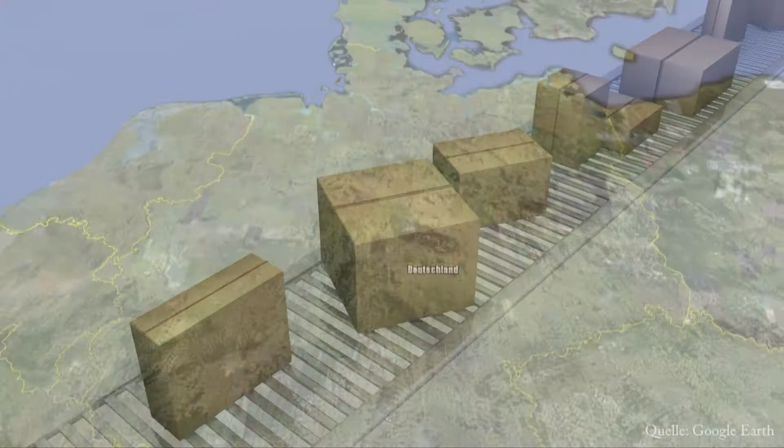Life is becoming faster and more flexible. Individuality is the buzzword. Over 100 million additional goods consignments in Germany alone. This logistical challenge calls for a new approach to a solution. The Internet of Things, predominantly conceived by two leading German researchers and a consortium of logistics specialists.

You see, the world is like a huge anthill. If you look at it from further away, it could certainly appear like this, and that is just the way the Internet of Things is organized. On the basis of limited information, targeted material flows are organized independently. That is the Internet of Things.

The research project Internet of Things takes a totally new approach. In fact, it introduces a paradigm shift in logistics. Farewell central hierarchical systems, welcome decentralized, highly flexible systems. The concept has been first implemented in intralogistics. The rapid delivery of niche products as well is the challenge here.

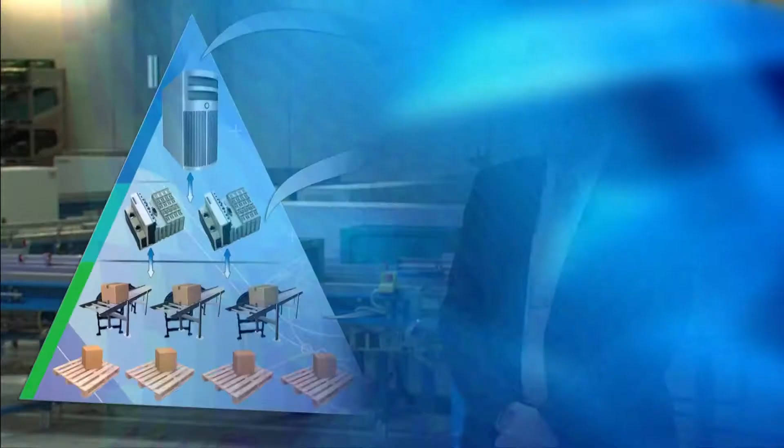Yet current systems soon encounter their limits. Conventional intralogistics is very rigid. This represents the major challenge for the Internet of Things project. In other words, to achieve maximum flexibility.

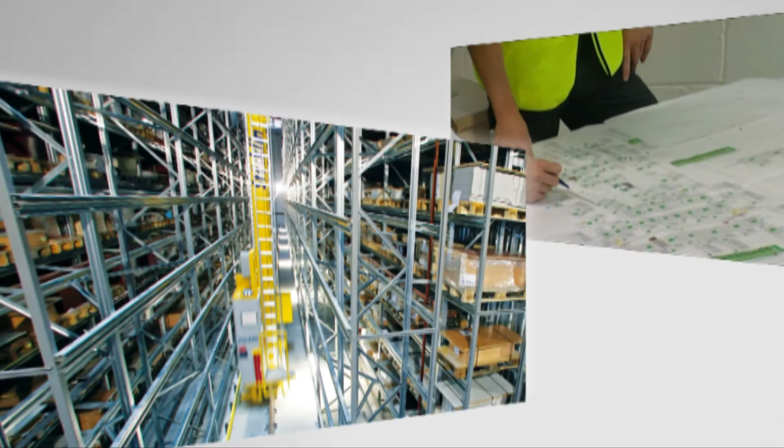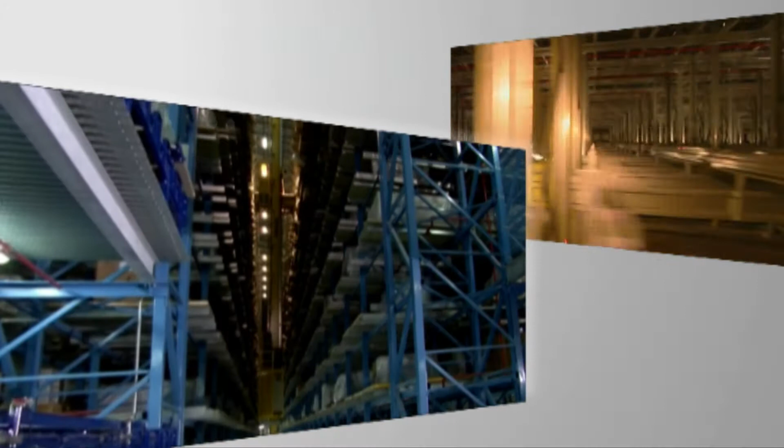Until now, intralogistical systems were individually planned for each application location, then installed and commissioned there at significant expense. The systems are unique. If the requirements change, a conversion will be extremely expensive. Nowadays, it's not worthwhile converting a larger intralogistical project, at least if you convert it on a large scale. It's cheaper to completely rebuild it.

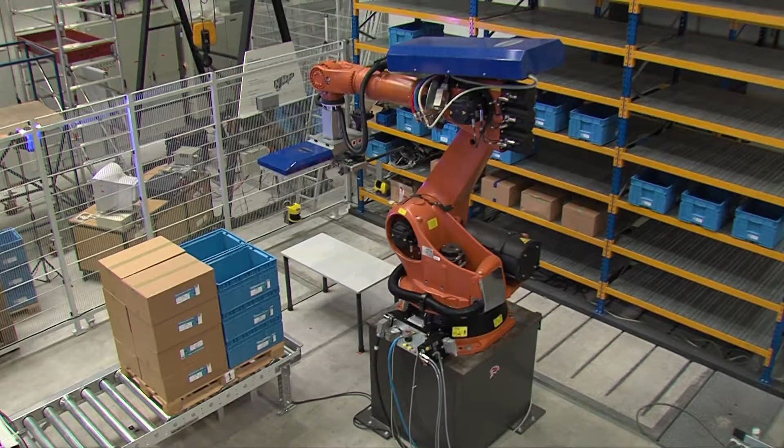In 2006, the Internet of Things was only an idea, but an idea with tremendous potential for the logistics sectors in the export nation of Germany, and hence also of great importance to the Federal Ministry for Education and Research. With over 3 million euros, the Federal Ministry for Education and Research consequently assisted a consortium from science and business with the goal of researching the feasibility of the Internet of Things.

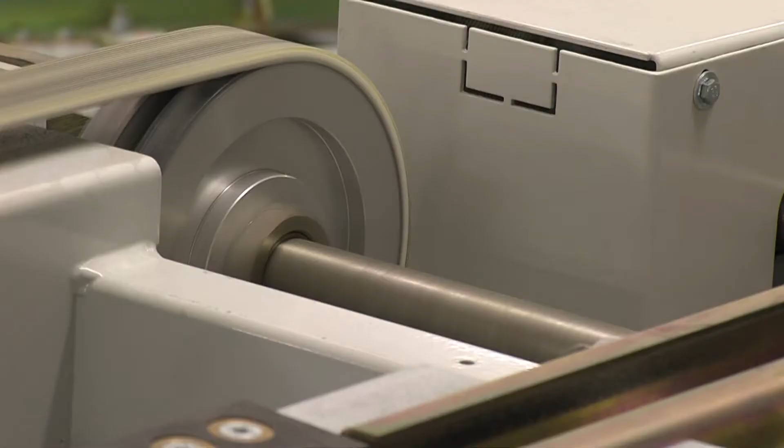When we began the project in 2006, it was an essential aim to reduce this expense. We have therefore developed a new modularization concept comprising a mechatronic module. Mechatronic means that we build this module up from mechanics, control technology and electrics components. Mechanics, logic and energy are bundled into one unit, a so-called entity.

That also makes it much easier to connect modules to one another in any order, because the interface actually no longer exists. The information is communicated with the product beyond the interfaces. This has the major advantage that this mechatronic module can be engineered, tested and commissioned without the entire unit having to be tested.

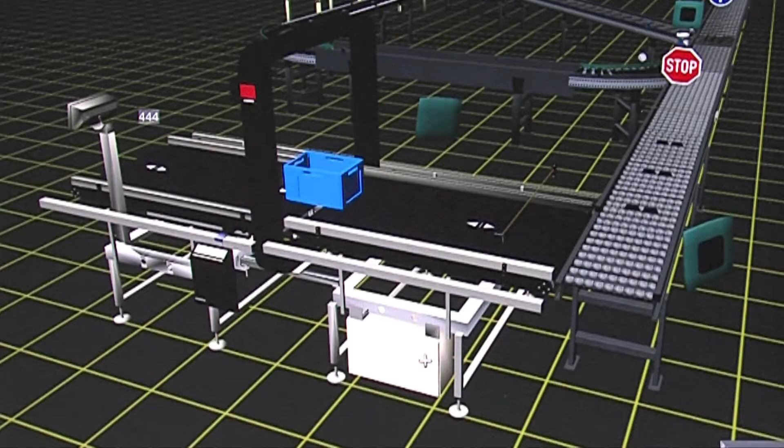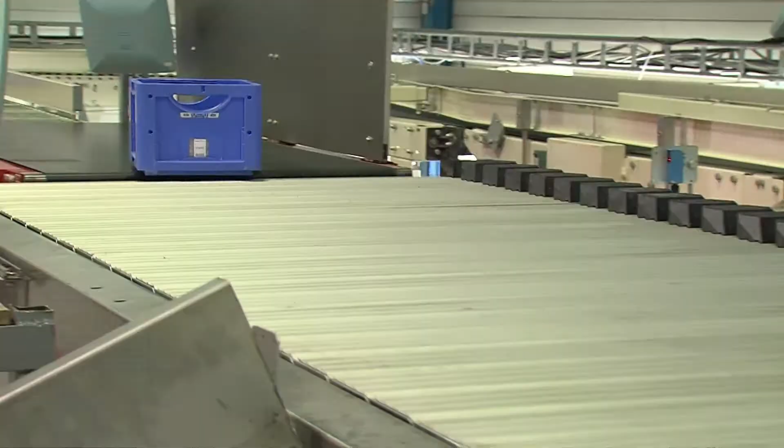After the plug and play, the new module is recognized by its neighbors and can hence be actuated in the entire system. This gives rise to a type of map. As with the colony of ants, the consignment becomes integrated in the overall system. The entity receives the destination and route data of each individual consignment and communicates this flexibly as a control to the next transport module without a central computer. If congestion arises somewhere or a section is closed off, the next best alternative route is automatically calculated.

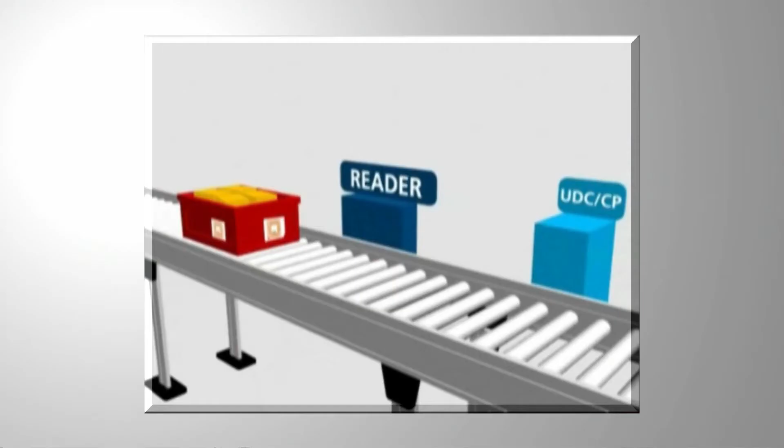To enable the consignments to arrive autonomously at their destination, you need a powerful chip which can also communicate with its environment. RFID technology is a very significant component in the concept of the Internet of Things, as it's possible to give the transport item information as well and allow it to make independent decisions. The chip can receive information and save or send data via electromagnetic waves that provide the necessary energy at the same time.

In test systems throughout Germany, the consortium has developed and tested the material flow technology, as well as universal software and control architecture. Products will result directly from this. These include control elements, smaller control components that are precisely customized to our requirements. A whole host of software has resulted, but above all, reliability has resulted. Yes, the Internet of Things functions. But does it also work in large systems?

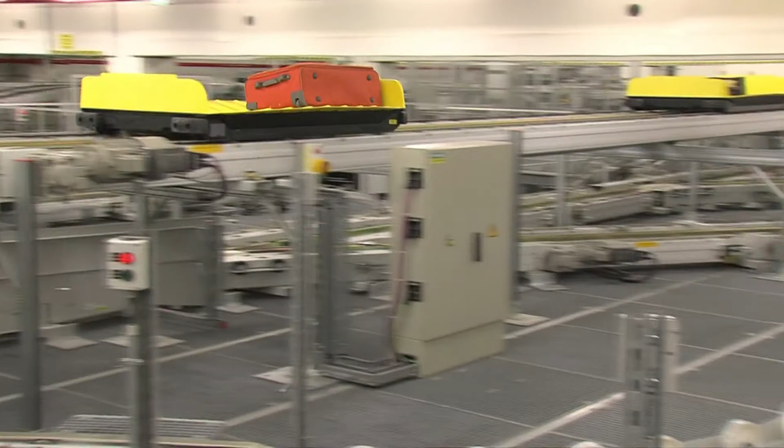To test this, the decentralized logistics was simulated at a major airport. We have undertaken one of the greatest challenges in intralogistics, namely airport luggage conveyance, having simulated a system with a peak load of over 10,000 items of luggage per hour there. The result? The Internet of Things can successfully control such systems decentrally. And, what is more, the extra expense for communication resulting from the decentralized system can effectively be overcome with modern technology.

For the logistics location Germany, the Internet of Things is a pioneering technology whose logistical architecture has now been successfully developed. In funding it, the Federal Ministry for Education and Research has contributed to the success of the project. The task ahead is to implement this new technology in products.